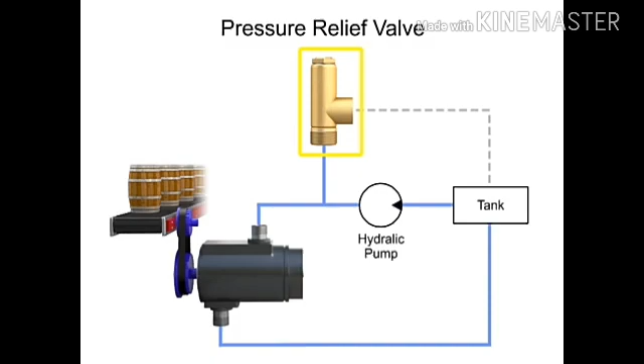This protects expensive machinery such as motors, pumps, and actuators from becoming damaged from high pressure. Without a relief valve, pressure can continue to grow until another component fails and pressure is released. Pressure relief valves fall into two categories: direct acting or pilot operated.

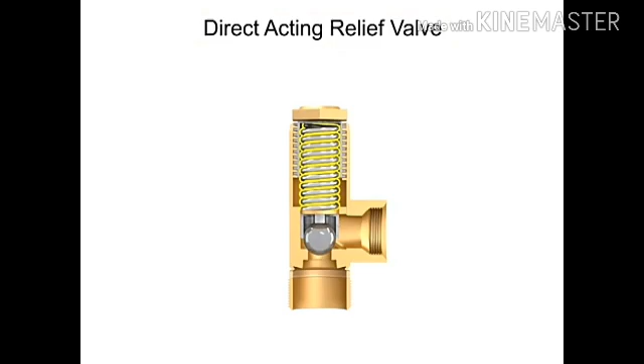A direct acting relief valve is held closed by the direct force of a mechanical spring. The spring force holding the valve closed is opposed by the system hydraulic pressure. The cracking pressure is the minimum pressure at which the valve will begin to open. This pressure is set by changing the tension in the spring using an adjusting nut or knob.

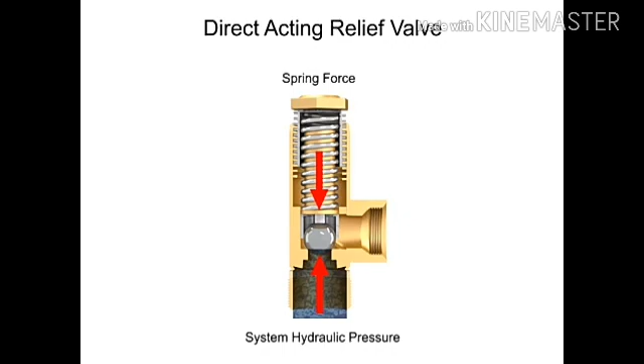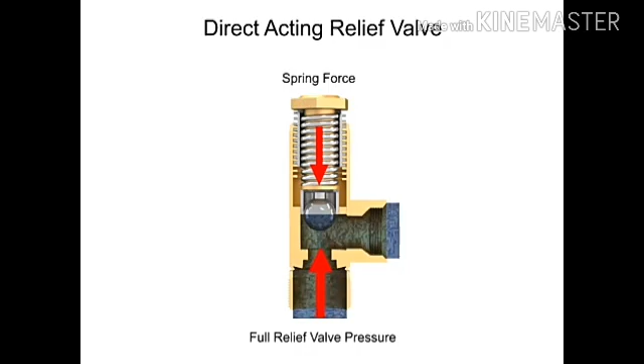As long as the system operates at a pressure at or under the cracking pressure, the valve remains closed. If the hydraulic pressure increases even a small amount beyond this level, the valve begins to open and fluid begins to trickle through. The pressure at which the valve is fully open is called the full relief valve pressure and is higher than the cracking pressure. When the hydraulic fluid in the system reaches the full relief valve pressure, the valve will be fully open and all fluid is discharged through the outlet port.

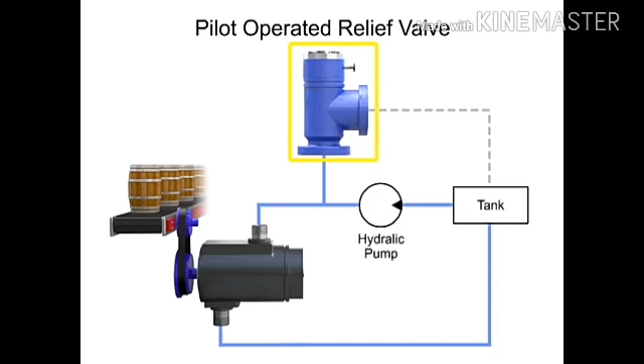A pilot-operated relief valve makes it possible to handle higher pressures and flow. It's also much smaller than direct-acting valves rated for the same pressure. This valve has two stages. The first stage is composed of the main valve with a poppet and spring large enough to handle the maximum flow rating of the valve. The second stage is composed of a much smaller direct-acting pilot valve, which includes a pilot relief poppet, pilot spring, and an adjustment knob. This smaller relief valve is usually mounted crosswise on the main valve body.

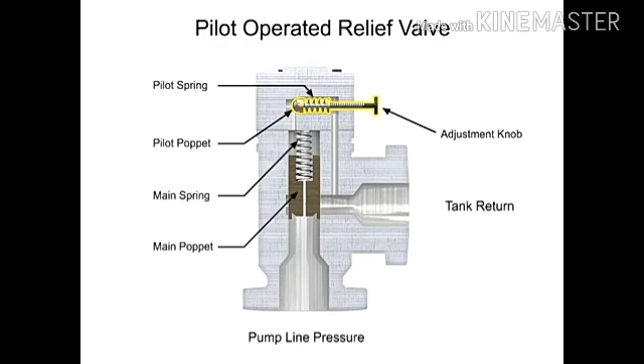As long as pump line pressure is less than the relieving pressure set on the control knob, the pilot poppet will remain closed. Since the pilot poppet is closed, the pressure in the main spring chamber is the same as the line pressure. Since these pressures are equal, there is no pressure drop from one side to the other, and the main poppet also remains closed.

When line pressure increases higher than the relieving pressure, the pilot relief valve moves to its open position. This allows fluid to flow from the pressure side through the orifice and across the pilot relief valve to the tank. Once the pilot valve is open, there is now a pressure drop across the main valve poppet with a higher pressure on the pump line side. This causes the main poppet to move, allowing full flow through the relief valve.

The same is true in reverse. As the pump line pressure decreases below the relief pressure set by the adjustment knob, the pilot valve will close. This allows the main poppet to close and restores a balance of pressure.

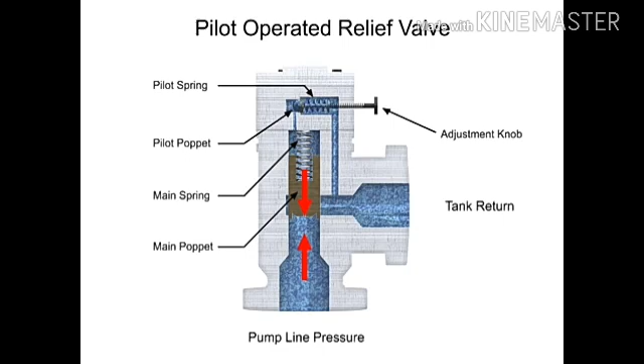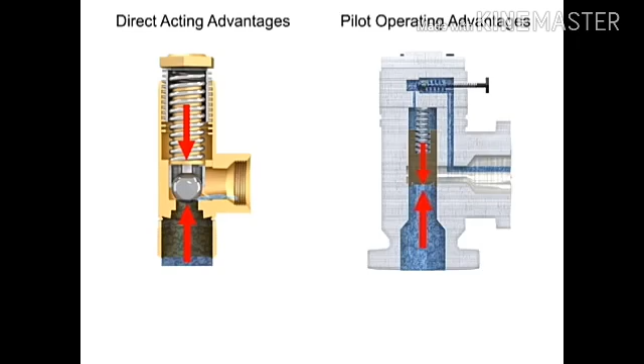Relief valves can be used anywhere in a hydraulic circuit where it's necessary to prevent pressure from exceeding a maximum level. Advantages of direct-acting valves are their low cost and fast response times to pressure spikes. Pilot-operated relief valves are advantageous due to their smaller size and ability to work with higher system pressures and higher flows.